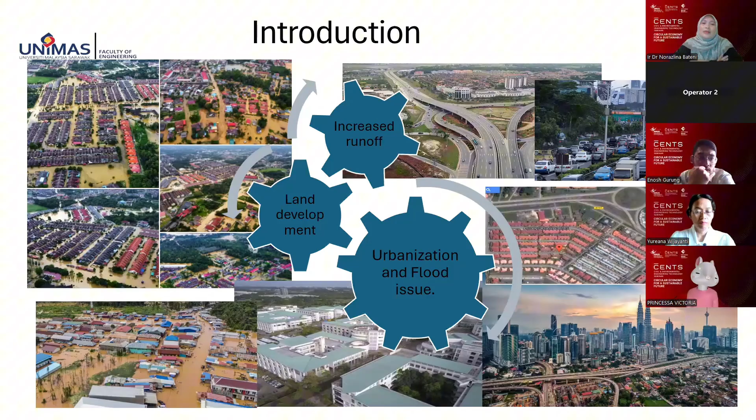And our monthly rainfall in the rainy season, December and January, is about 300 to 400. Imagine we are receiving rainfall of about 300 to 400 during December and January, and this is causing the overflowing of rivers, causing flash floods, causing flood everywhere. And when it floods, residents need to move elsewhere, and of course it will be a loss to our economy.

Okay, then still talking about climate change in Malaysia, a small change of temperature can bring a huge disaster, such as unpredictable weather and sea level rises. When talking about sea level rises, then we will talk about overflowing of the river.

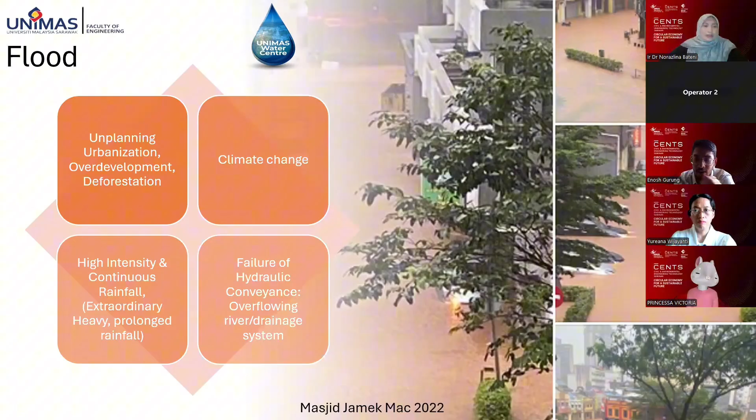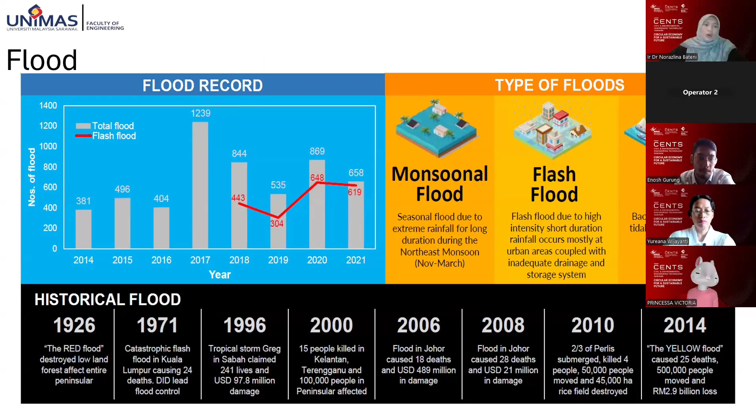Okay, the southern part experienced the most temperature change, up to 0.6 degrees Celsius in 20 years. And if this pace continues, the change for Malaysia will be 1.1 degrees Celsius from 0.6. And even though we are in Malaysia or in Indonesia, no one is excluded from this climate change. Okay.

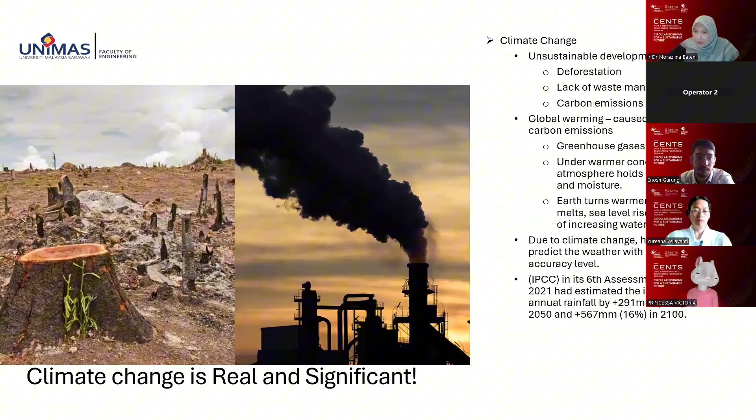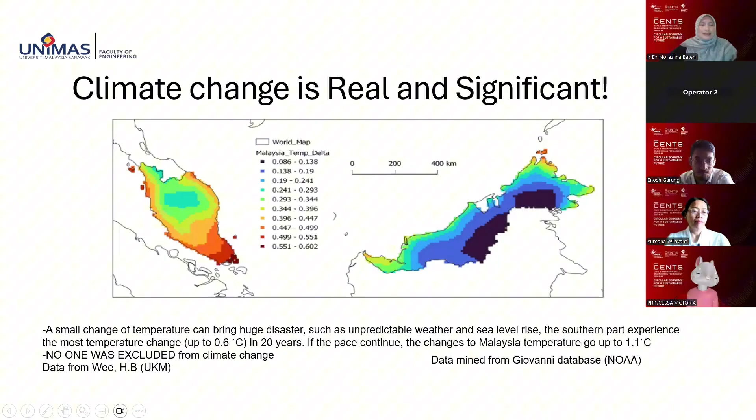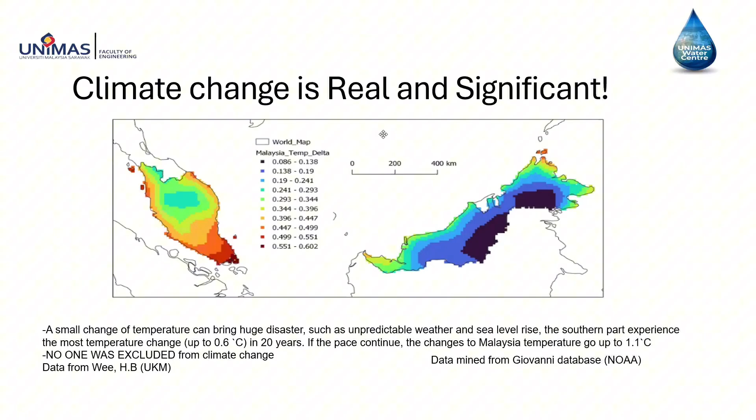Other than climate change, other than urbanization, I would like you to see what happened to our drainage. Drainage is our hydraulic conveyance. The hydraulic conveyance system needs to be maintained. We design the drain so that it can catch the runoff, it can catch the rainfall. But if a system that we designed to catch the rainfall cannot catch it, it fails

due to our behavior. We throw the rubbish here and there, then the system will clog, will block the drain, will be sedimented, will be silted due to the trash, the debris, litter, rubbish, and pollute our system. Okay, this happens when we don't have any awareness, when we throw, kita buang saja sebarang, we didn't take our responsibility to our Mother Earth. Okay.

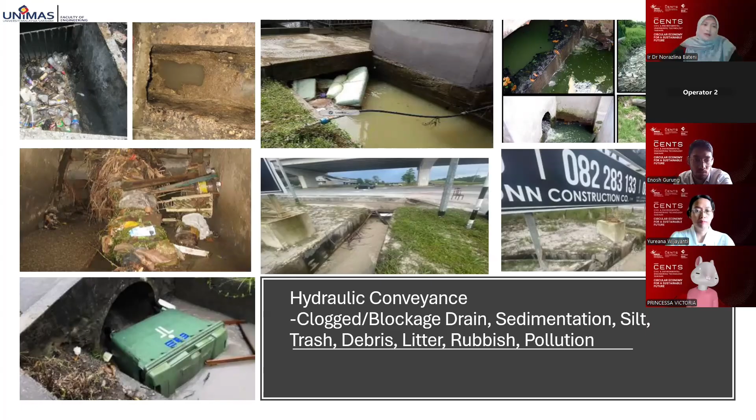Talking about extraordinary rainfall, it's linked together with climate change. You can see now, dulu mana ada hujan yang sangat banyak. Now we have to face this extraordinary rainfall season. Usually we as engineers design our drain according to 1 in 10 years average recurrence interval, 1 in 20 years average recurrence interval. But when it rains at 1 in 50 years, 1 in 100 years, then finish. Our drainage system, our hydraulic conveyance, will be full of water, overflow, and flood everywhere.

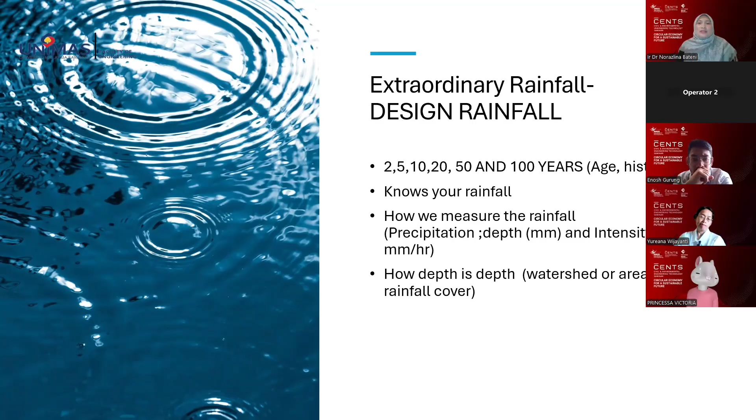So when you are the engineer and need to design for rainfall, you have to know your rainfall. What is meant by once in 10 years, 1 in 50 years, and once in 100 years rainfall? Okay, how do we measure the rainfall? There are two types of measurement for the rainfall. Either we measure it by depth, using precipitation, or we measure it using intensity in millimeter per hour. Maksud dia dalam sejam, berapa jumlah hujan yang kita receive, in millimeter per hour.

And what is depth? Let's say we are talking about depth in millimeter. Depth is according to the watershed or area that the rainfall covered. Say that the rain gauge station is covering about 1 acre. Then for that 1 acre, the depth of rainfall, let's say 1 in 5 years, is about 40 millimeter. 40 millimeter means from the zero bottom of the platform level up to that level. That is the depth.

How do we measure design precipitation? Why? Because we need to know the severity of rainfall and what duration can cause flood, so that you as the future engineer can design any stormwater infrastructure, any green infrastructure, untuk catch, untuk tangkap, untuk store the amount of water. Okay, there is the intensity.

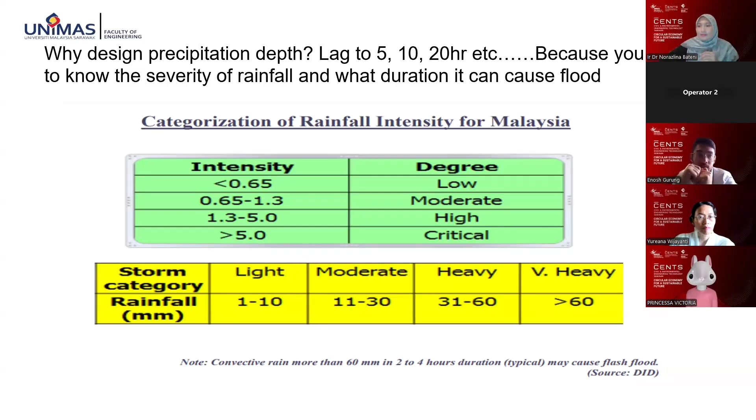Therefore, as a hydraulics engineer designing in Malaysia, we will follow Manual Saliran Mesra Alam or Urban Stormwater Management Manual in dealing with this amount of runoff or rainfall. We will choose either it is designing for minor system or we want it to be major system.

This is the type where we want to develop the area, such as if it is residential, so bungalow and link house, we will design it for 5 years. If it is drain, then we design it for 1 in 5 years rainfall sahaja. And if it is university, commercial, industry, school, and etc., it will be designed 1 in 10 years average recurrence

interval. The major system will be like SMART tunnel, a dam, and etc. If it is the major system, the hydraulics conveyance that is designed will be 1 in 100 years rainfall. Okay.

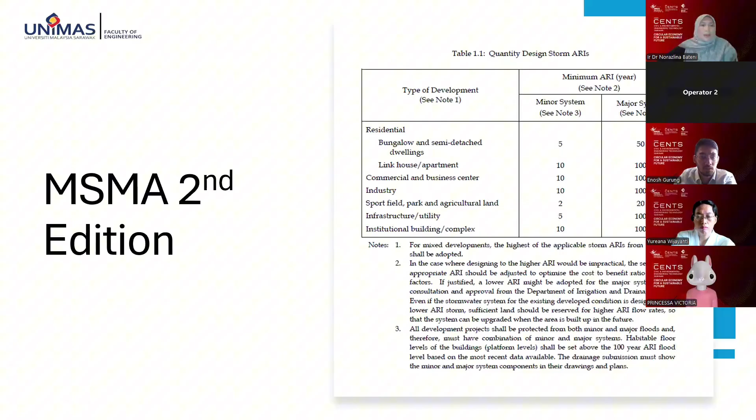Still talking about rainfall, because I think we are civil engineering students. Talking about intensity, duration, frequency curves. Rainfall intensity, duration, frequency, IDF curves is a graphical representation of the amount of water that falls within a given period of time in that catchment area. And it is used to aid the engineers to design urban drainage works.

Okay, kami kalau di Universiti Malaysia Sarawak, we learn this one during our third year hydrology class, designing urban drainage networks. Then the establishment of such relationship was done as early as 1932 according to Ven Te Chow. Ven Te Chow is the father of hydrology.

IDF relationship is a mathematical relationship between the I, the D, and the return period T, or equivalently the annual frequency of exceedance F, typically referred to as frequency only. Okay, frequency is talking about 1 in 2 years, 1 in 5 years, 10 years, and etc.

Indeed, the IDF curves allow for the estimation of the return period of an observed rainfall event, or conversely, the rainfall amount corresponding to a given return period for different times. Okay, two common frequency analysis techniques to come up with this IDF curve are the Gumbel distribution and LPT distribution. What is IDF curve? This is IDF curve.

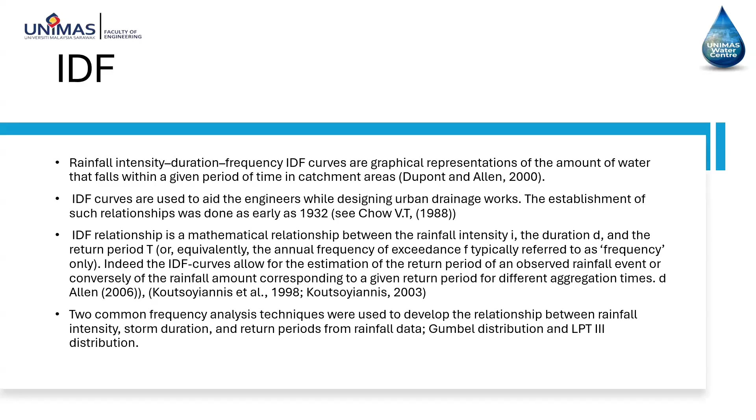Intensity, duration, frequency curves. Selalunya when we design a drainage system or any urban infrastructure to capture rainfall, we will talk about how much water, how much rainfall we want to store inside that drain. Okay, so we will find out the intensity. This one is talking about the duration frequency curve.

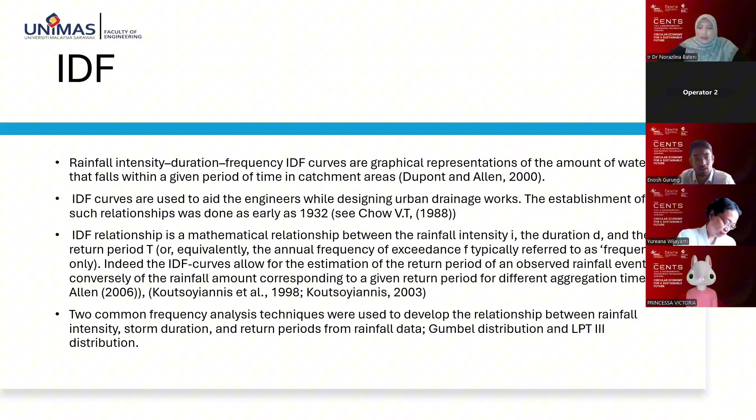For this one, the formula is I equal to lambda T^k over (d plus theta)^eta, and k, lambda, theta are fitting constants, nilai yang diberi, values given following the Gumbel and LPT. And for Malaysia, we can obtain these values from MASMA, and for Sarawak and Sabah it is HP26. It is available online.

And T is talking about the years, the frequency, 2, 5, 10, 20, 50 and 100 years return period. D is about which duration you want to design that rainfall, in 20 minutes or etc. It can be interval times of 5, 10, 20 minutes until 24 hours, depending on you.

But in urban drainage systems, D here is the time taken along the longest route, let's say from your rainfall falling to the ground, the first route, the zero route, to go to the main outlet. The minimum D duration is about 5 minutes for Malaysian conditions.

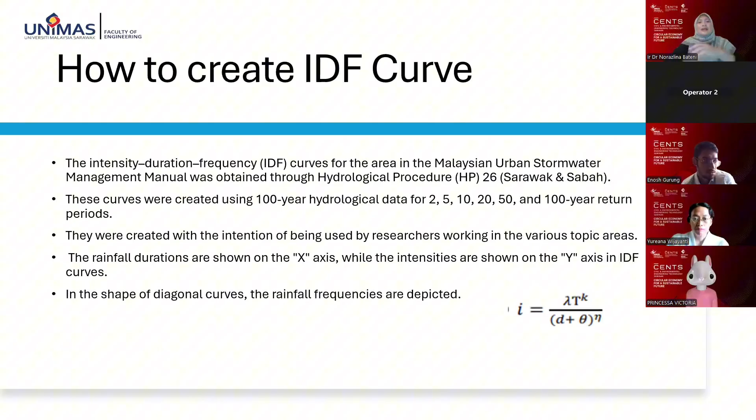Even though sebenarnya kalau hujan turun, if the rain falls, it will not take about 5 minutes. Turun saja, terus masuk drain. Within this drain is the outlet, the main outlet. We are talking about one catchment, and the main outlet at the end. For Malaysia, our minimum time is 5 minutes, and for urban conditions it will take about 15 to 20 minutes to reach the drain system.

Okay, sorry, I hope you are not bored with me.

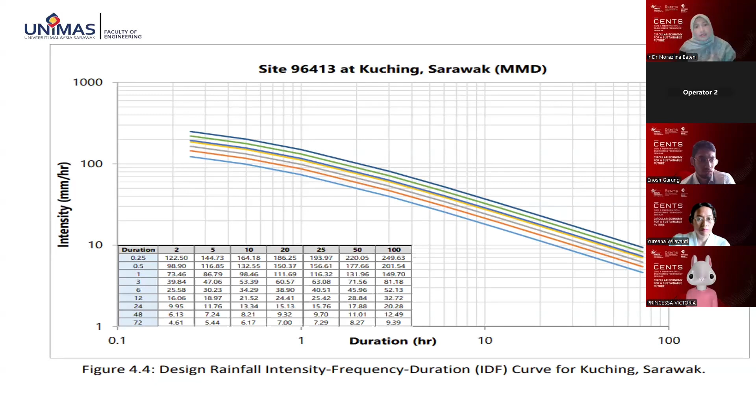Okay, now I would like to talk about the hydraulic system. Earlier I talked about the rainfall system itself, which is about the hydrology system, the amount of rainfall that we need to manage. Now we talk about the hydraulic system. Hydraulic system is the system that can store, catch, and receive the rainfall, and with that hydraulic system we can control the flood.

Our hydraulic system can be natural or man-made, such as stream. Stream, of course, is natural. River and drainage act as rainfall runoff conveyance, in this stream, river and drainage system. We can talk about watershed concepts: where is the upstream and where is our downstream part? The upstream is the area where the stream begins and goes down to the downstream, which is the river mouth - the river area until we reach the sea. Then we talk about hydrology and hydraulics of this system, and drainage or hydraulics conveyance system design.

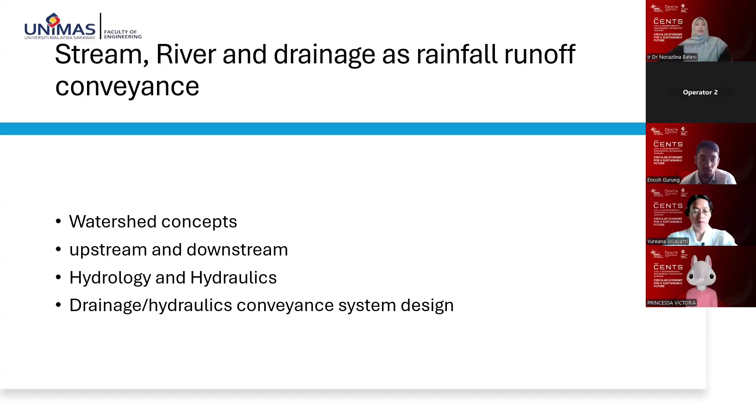Sources of stream flow can be watershed or catchment, consisting of river and stream. Large watersheds are made up from smaller watersheds. Usually our upstream part is the mountainous area, starting from a very straight, shallow stream or river, then goes down to the middle part that looks like a snake, with concave bends and so on, until it reaches the sea.

Large watershed are made up from smaller watershed, consisting of land area that sheds water to an outlet during a rainstorm, and rainfall contributes water to the outlet point.

There is one, and then there is also retention. Retention is like a pond - it is storage held for a long period of time and depleted by evaporation.

That is retention. We can also talk about detention - the comparison between retention and detention. Retention is a pond where the water is stagnant in that area, but detention is a short-term storage depleted by flow away from the storage location. It stores water only for a short time. It can be permeable pavement, a football field, or anything that can help store water. And then there's overland flow.

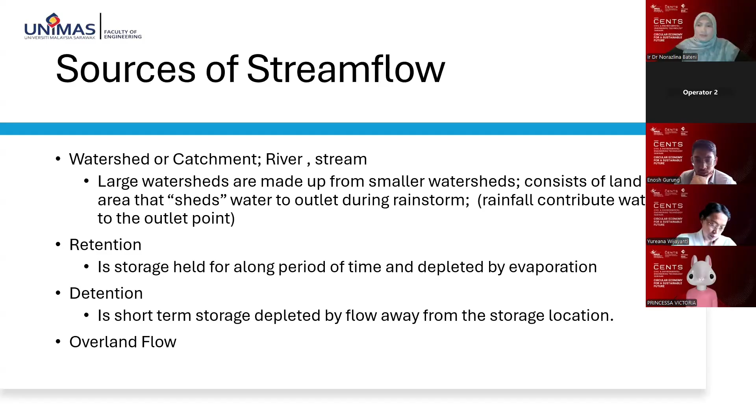Let us move into the old paradigm. This is an urbanized floodplain. Before, we can see that there was forest everywhere, green and so on. And then there is residential development everywhere, and you can see the flood, the earth drain, due to rainfall there. Traditional practice - I'm talking about Malaysia.

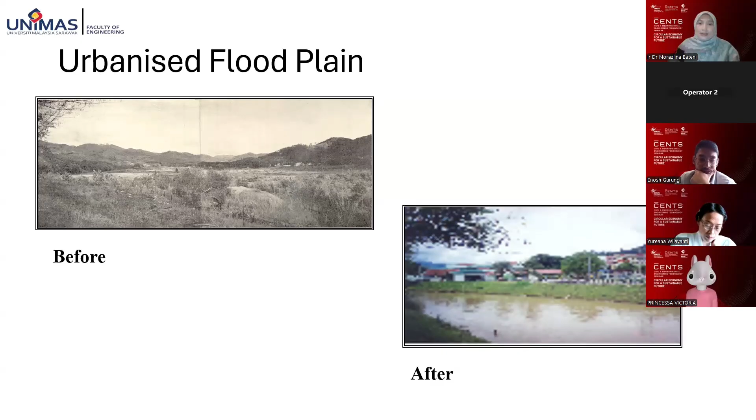Before this, our traditional practice, our old paradigm on managing rainfall or stormwater runoff, is the rapid disposal method or conveyance oriented approach. What does that mean? When it rains, it becomes runoff. Then the runoff will be disposed of as fast as possible to the hydraulics conveyance, to the drainage system, and to the stream. That is traditional practice: rain falls, becomes rainfall, becomes runoff, and it goes to the hydraulics system, then to the drainage system, and that drainage system will flow it to the nearest stream or river.

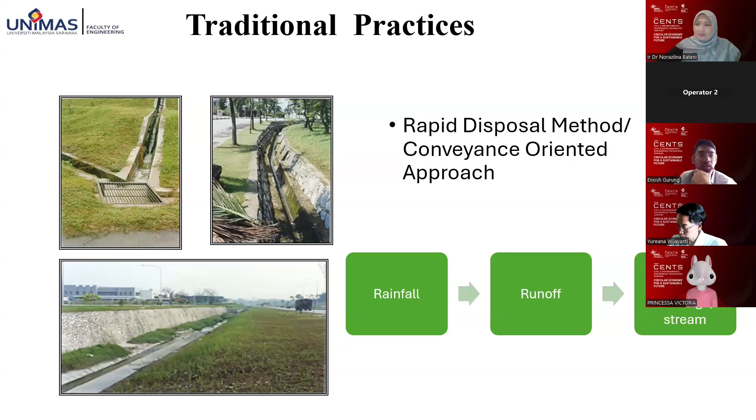During our traditional practice, what we do to manage stormwater is maximize the conveyance capacity. We are talking about concrete drains only. And if the concrete drain cannot store the amount of rainfall, we will widen it, deepen it, straighten it, and line it. That is the traditional practice in maximizing the conveyance capacity.

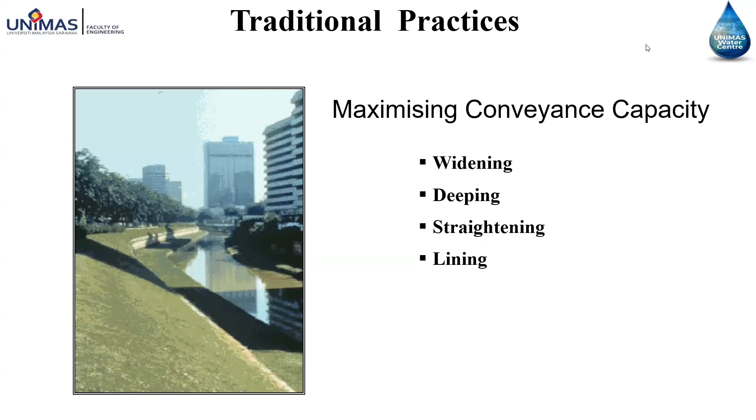The design approach is disposal - dispose as soon as possible. It is an open loop system, and we want the runoff to go as fast as possible to the lakes and to the watershed or water bodies. We want it as fast as possible, and the system is combined with the stormwater sewer.

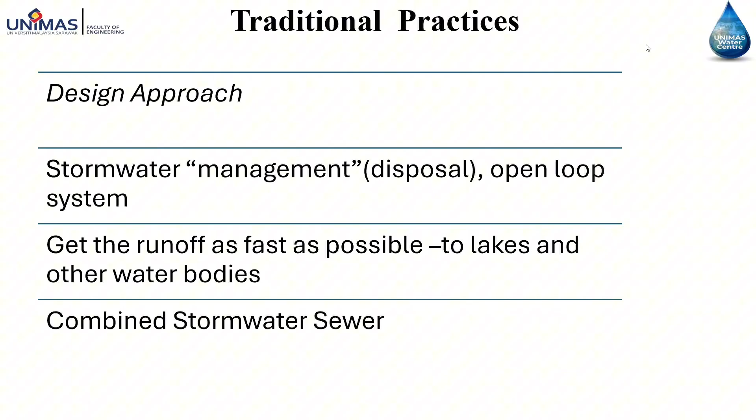This is what happened during the old paradigm: rain falls, and the rainfall goes as fast as possible to the downstream - this is upstream, and the downstream goes to the river. What happened? The upstream is safe, okay, but the downstream part, the floodplain area, experiences river overflowing. This happens with heavier rainfall and pollution, little vegetation to absorb moisture, minimal infiltration of water, no deep percolation, and so on.

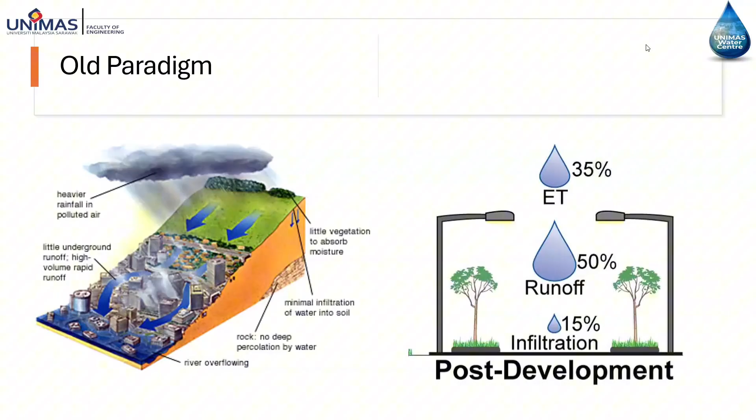This is what happened during post-development. For runoff, let's say we have 100% of rainfall falling to the earth: 35% will become evapotranspiration, 50% will become runoff, but only 15% infiltrates, seeping into the ground. Only 15% goes to the ground. This is the difference between pre- and post-development.

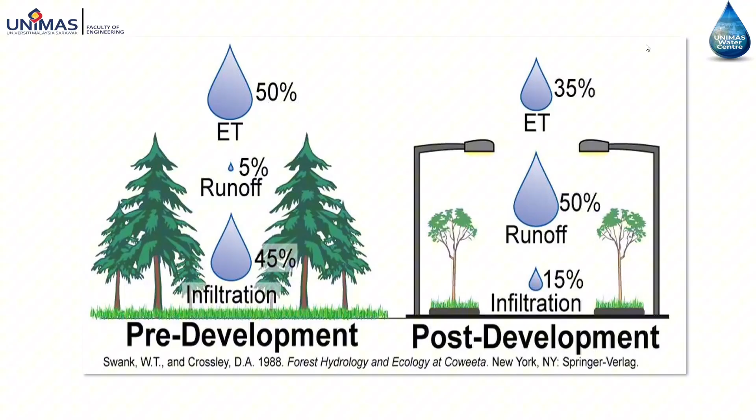We rarely hear of rural areas flooding, but it's common for urban areas to have flash floods everywhere. Why? Because grey infrastructure, concrete, is everywhere. Runoff becomes 50% - runoff is rainwater that does not seep into the soil. Here, when it is a green area, the runoff becomes only 5%, and 45% becomes groundwater, infiltrating into the ground.

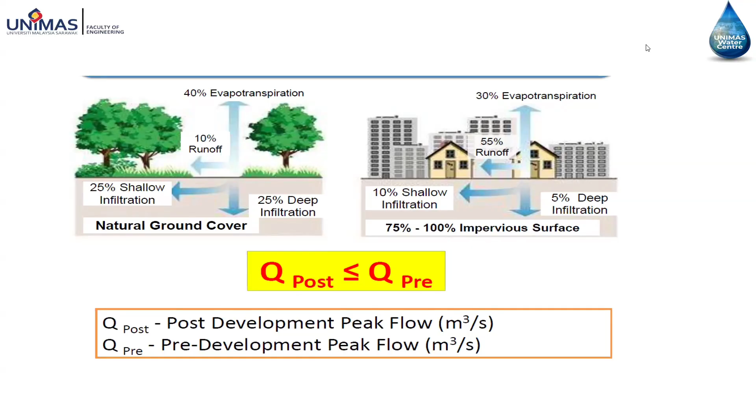This is what happens due to the old paradigm. Concrete is everywhere, hard structure, grey infrastructure, development is everywhere. And what happens when development is everywhere? No runoff infiltration happens, peak flow happens, and flash floods can be seen.

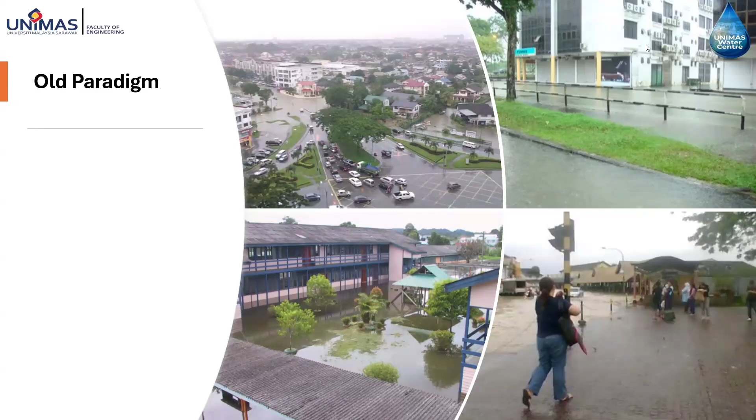I'm talking about Malaysian streets. You can see this very hard concrete, with no place for rainfall to infiltrate the ground. And we are talking about flood here, where we want to store the water from the rainfall.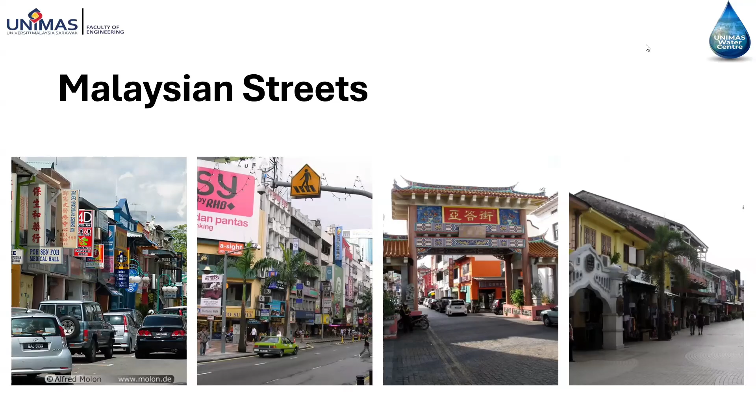Due to that, there is a need for an approach of stormwater management, green infrastructure. What is storm? Storm is hujan, pengurusan hujan - stormwater management. Stormwater management is about how we can balance the environment, the economics, and the social aspects - these three work-life balances. And through this, we need to apply green infrastructure.

Talking about green infrastructure in the world, we have Low Impact Development, a USA term. We have Sustainable Drainage System, SUDS, from the UK. Water Sensitive Urban Design is an Australian term. We have Active, Beautiful, Clean Waters design guideline, PUB, from Singapore. We have Sponge City, where they design the system to absorb water like a sponge rather than hard concrete or rock. Rock will push water away, but with the sponge, they infiltrate the water.

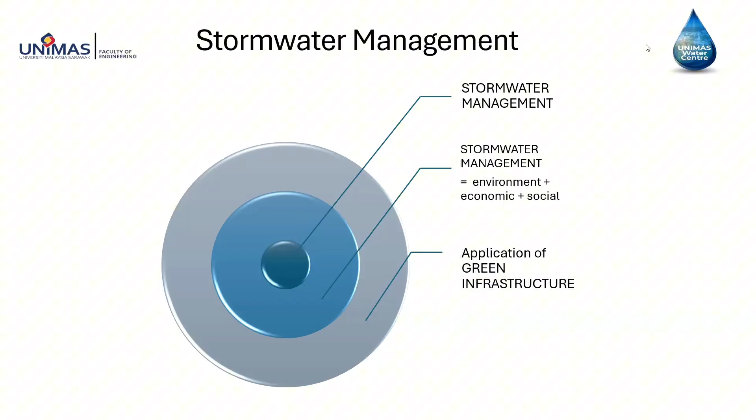This is still talking about the terms used. We are moving into this green infrastructure, similar to the United States LID, Australia's WSUD, Britain UK's SUDS, New Zealand's LIUDD, and Malaysia's Manual Saliran Mesra Alam. In our state of Sarawak, we have our own manual, standard codes and guidelines to manage our stormwater, called Sarawak Urban Stormwater Management, an adaptation of MASMA.

With this system, we put a guideline, a list of codes and standards of requirements that any developer, contractor, or consultant needs to follow. For example, when there is any development, 30% of the area must be green area, and with that 30% area, 10% must have system facilities.

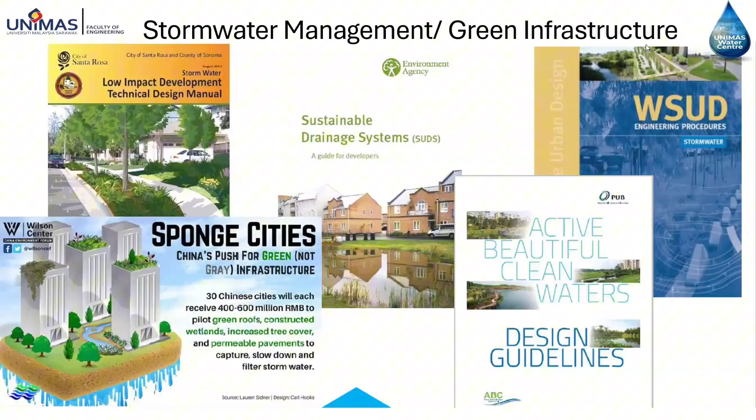Now we move to what system facility means. This is talking about Sarawak Urban Stormwater Management and Manual Saliran Mesra Alam. Stormwater management covers quantity control, quality control, erosion and sediment control to ensure no sedimentation happens, the operation and maintenance of this system, and the aesthetic value - how to make it beautiful with green nature-based solutions rather than grey infrastructure with only concrete everywhere.

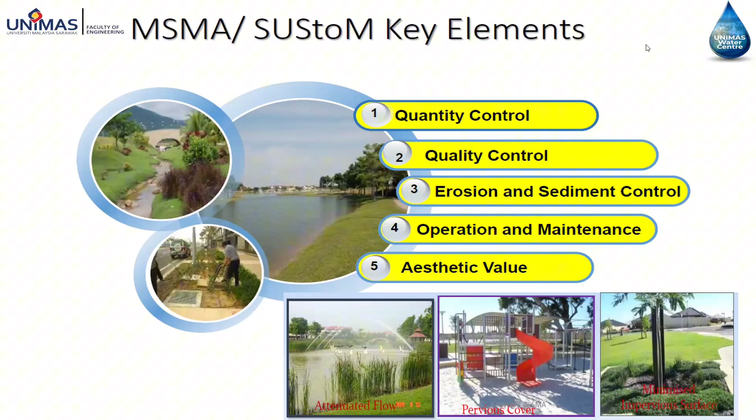This is an example of urban stormwater management technologies. We have constructed wetlands, permeable pavement, bioretention systems, vegetated swales, or rainwater harvesting systems under the building to help capture rainfall that becomes runoff. This is an example of a rain garden system, permeable pavement, underground rainwater harvesting, bioretention, rain garden, and so on.

Talking about quantity control - this is how we can capture rainfall according to MASMA, the Stormwater Management Manual, and the system. As mentioned before, 30% of the development you want to design for a catchment area must be green area. From that 30%, 10% is recommended for any green infrastructure facilities - it can be an on-site detention pond, a dry pond, or a wet pond.

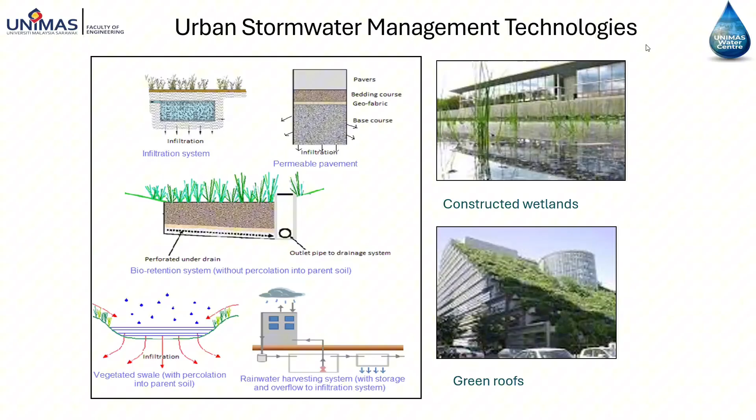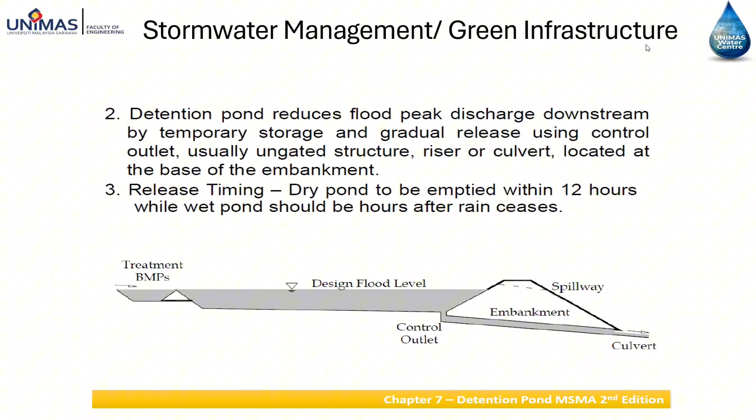On-site detention pond is a very big drainage system that can be located below ground or as an above-ground tank - they call it an on-site detention pond. This type of green infrastructure is recommended for development areas less than 5 hectares.

For dry pond, you can make it nice, back to nature, with tree planting here and there, making it a recreation place for people to jog and walk. This system is recommended for 5 to 10 hectare development areas. And for wet pond, it has a permanent pool level.

Above this permanent pool level will be a spillway, and the design flood level will be higher. The suitability will follow the topography, the geology, how big your site is, the subcatchment, and connections to the main drain.

But this system is a must for development, for consultants, for contractors in Malaysia to do any development project since 2018. Rather than a rapid disposal system, you have to manage your own runoff in your own catchment area, and we name it the control at source approach.

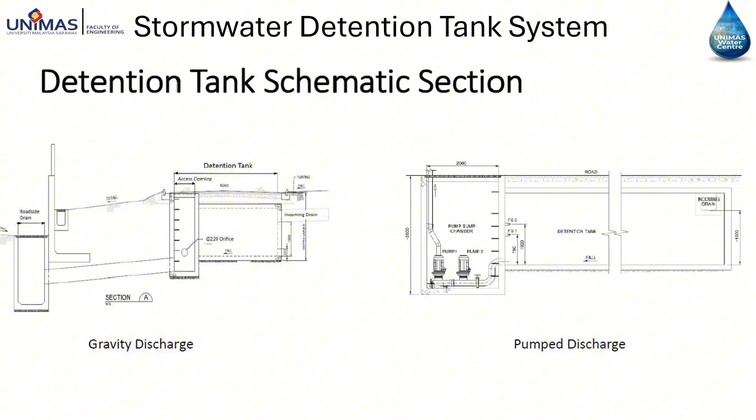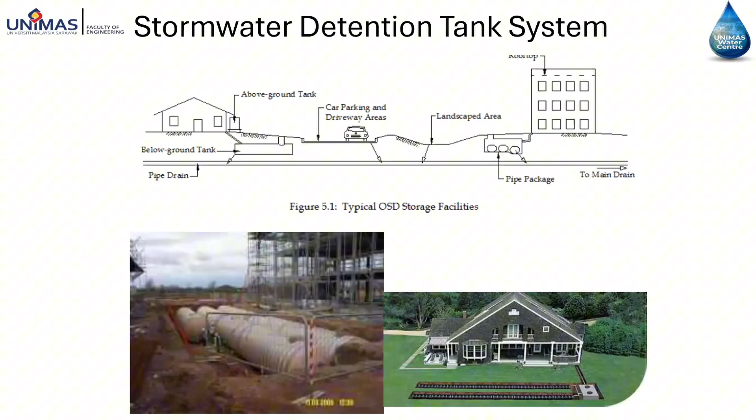Another retention pond, rainwater harvesting, talking about permeable pavement rather than using solid concrete parking. We can use permeable pavement, a very beautiful PICP, permeable interlocking concrete pavement. Another type, underground permeable pavement.

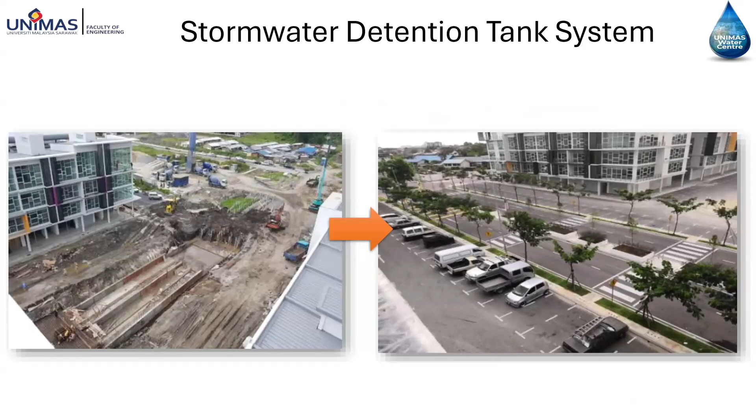MOVA, another detention pond system by a UNIMAS researcher.

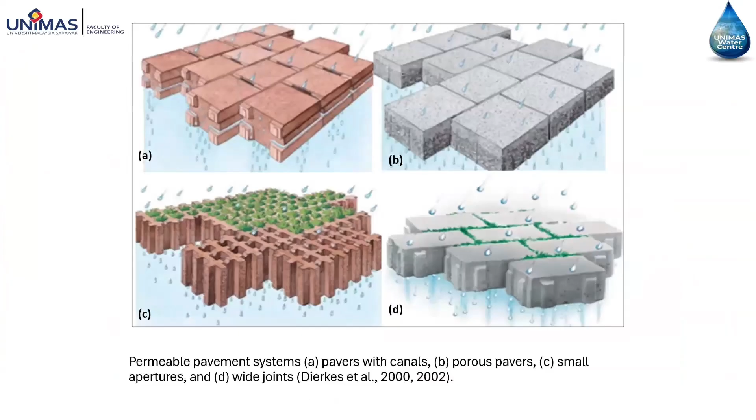As I mentioned about back to nature, making it beautiful with green areas rather than grey infrastructure. Another rain garden, very nice, very lovely.

This is a very big infrastructure, an underground flood storage and transfer tunnel. We can see this one in Japan.

And then another one, our Smart Tunnel. This is one of the longest tunnels, and it received CNN's top 10 world's greatest tunnel. It is a multi-function tunnel, can be storage for stormwater runoff and can also be a highway. This is our Tun Mahathir initiative.

How it works - you can see the link to the smart tunnel using this YouTube video.

Another on smart tunnels, and I want to talk about community awareness and flood alert, as this is flooding monsoon season. You have to have a disaster kit, prepare the disaster kit, calm and have a plan, gather your important documents. If you are living in a flood prone area, stay alert and updated, save important numbers such as bomba (fire and rescue), JPAM and police, preparing all these things for a disaster kit.

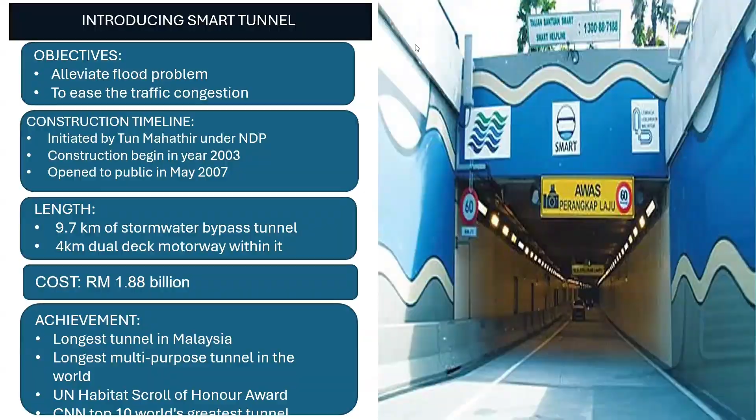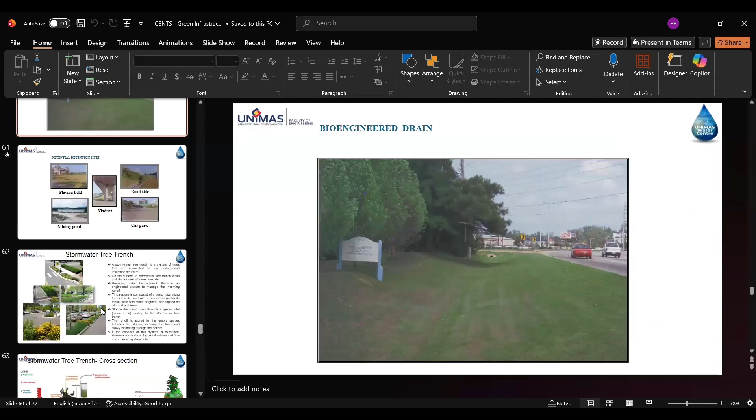And your generation has the calculations, your generation, the engineer, you as a new generation today, Gen Z or Gen Alpha, has the knowledge, the technology, and the urgent need to redesign our world. The choice is on you, and it is simple. As the future engineer, and maybe some will be a policy maker, do we continue to build a brittle single-purpose grey system that fails spectacularly, or do you want to design a beautiful multifunctional green system that adapts, that evolves and sustains our community?

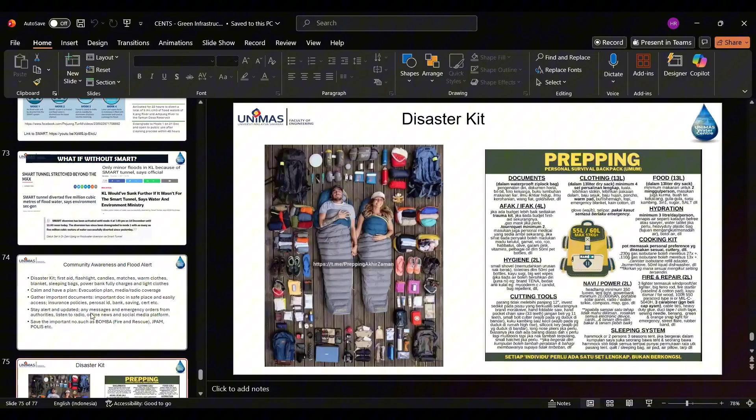Green infrastructure is not a trend, it is a professional responsibility of you as future engineers. I urge you to study it, to advocate for it, and build your careers around it. Thank you, terima kasih, congratulations everyone.